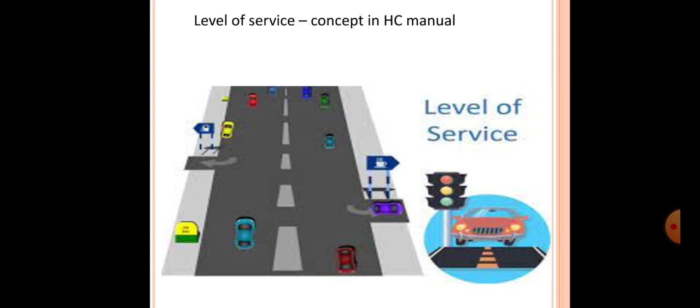And level of service usually describes these conditions in terms of various factors, like the speed, the travel time, the freedom to maneuver, the traffic interruptions, the comfort, convenience, and also the safety. And usually there are six levels of service that are recognized, and they are designated from A to F. So we say level A or LOS A, that is level of service A, or LOS B, likewise from A to F we designate this. And here LOS A or level A represents the best operating condition, that is free flow.

And the level of service, like I told you, is a concept of town planning, and so a knowledge of all these levels helps in town planning. And when we say level of service F or level F, it indicates the worst, that is a forced or breakdown flow. And on urban roads, the level of service is affected by various factors like the heterogeneity of the traffic, the speed regulations, the frequency of intersections, the presence of bus stops, on-street parking, roadside commercial activities, etc.

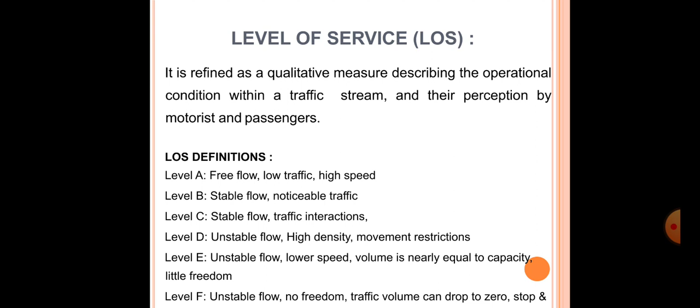And level of service, like I told you, can be designated from A to F. And this LOS is a qualitative measure which is used to symbolize the quality of traffic services, and it is also used to examine the highways by categorizing the traffic flow and allocating quality levels based on performances like the speed, density, etc. Now each of these levels, we'll see what it is. Say the first one, that is level A. A is considered as the best quality of traffic, where the driver can enjoy his drive with better flow as well as speed of their own choice.

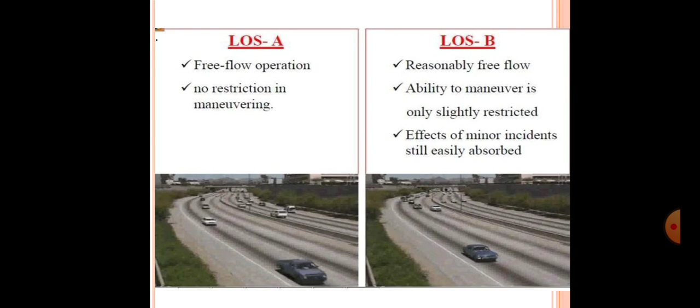And here there will be no restriction in maneuvering, whereas like I told you in the beginning, F stands for the worst quality of traffic and A stands for the best quality of traffic. And in level A, there is a high level of physical and psychological comfort for the drivers. Now when it comes to level of service B, here there is a traffic flow where the speed of the vehicle is maintained, and the flexibility for moving between the lanes within the traffic will be slightly limited as compared to that of A. Here also there is a high level of physical as well as psychological comfort to the drivers.

Now coming to C. So C stands for a stable flow. That is, here the flow is stable, or we can say nearly free flow, and the mobility of changing lanes requires the driver's attention, and it is noticeably limited compared to the earlier ones. Experienced drivers are comfortable, and the minor occurrences may not have a great effect, but the service will show noticeable effects, and there is a chance of traffic delays, unlike that in A or B.

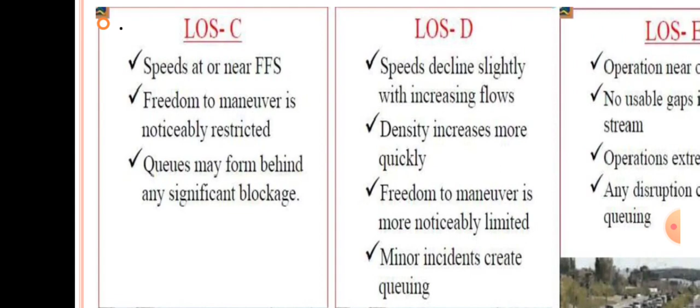So here you can see, like in the figure, there is freedom to maneuver, but noticeably restricted, and also queues may be formed behind any significant blockage. So that is level of service C.

When it comes to level D, here D signifies approaching unstable flow, and here the speed decreases because the number of vehicles will slightly increase, and also the freedom for changing lanes within the traffic stream will be quite limited, and the driver's level of comfort also will decrease, and a minor occurrence on the roads can create delays for others as well. This is usually common on urban streets during peak hours. So that's what you see here, level of service D.

Now coming to LOS E, or level of service E. So E also represents a sort of unstable flow, because of the lesser or unusable gap. The flow becomes irregular, the speed can increase or decrease, and the traffic will rarely reach its appropriate limit, or the suggested limit. Here the speed is nearly or above 50 kilometers per hour, and the level of comfort in this flow will become poor for the driver. That is level of service E. Mostly in urban areas, the problem is faced because of road congestion, which cannot be changed.

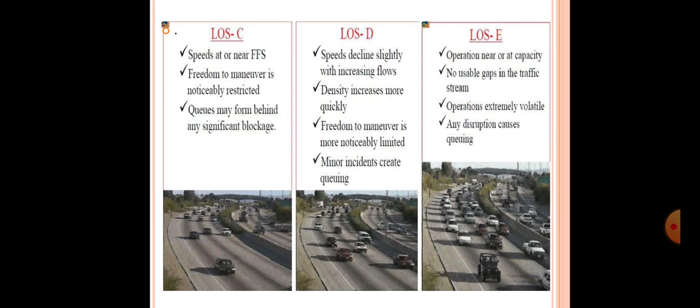Now coming to level of service F. Level of service F leads to a breakdown of the flow. This is mainly because there will be interruption, and queues will form behind the breakdown points, and in this case the demand will be greater than the capacity.

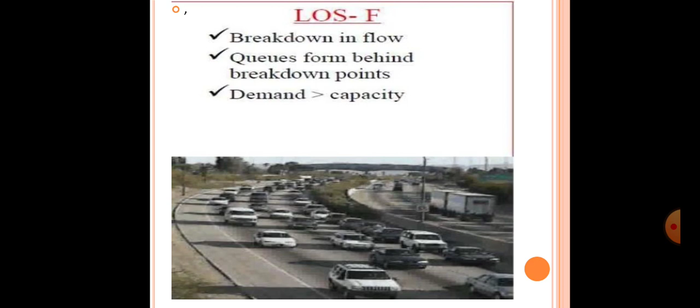On a highway, the travel time is usually not predictable, and it usually exceeds its capacity. We can say that a highway can face a level of service D during its busy hours, C on some days, and F on various other days, or even once in a week. So that's all about level of service.

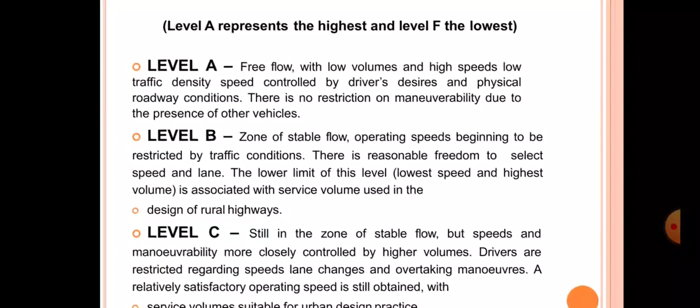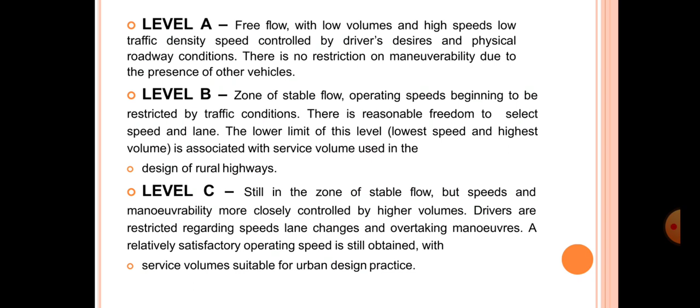So we just have a revision. A indicates free flow with very low volume and high speed. B indicates the zone of stable flow, where the operating speed will be restricted by the traffic conditions. Level C is still in the zone of stable flow, but the speed and maneuverability will be controlled by the higher volume. Level D approaches unstable flow, and the operating speed will be tolerable, but considerably affected by changes in the operating conditions.

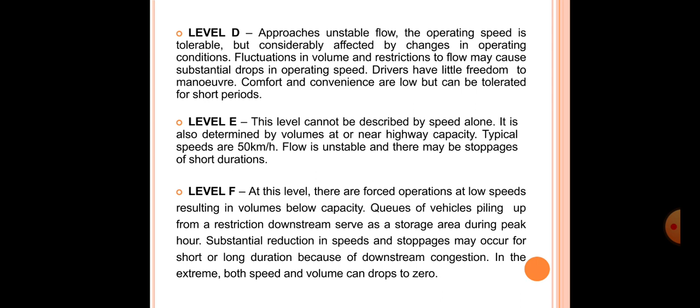Level E cannot be described by speed alone, and has to be determined by volumes at or very near the highway capacity. And level F has forced operations at low speed, which results in volumes below the capacity, and this also leads to a breakdown of the flow. This is what level F indicates.

So that's all for today. We'll see the remaining in the next class.